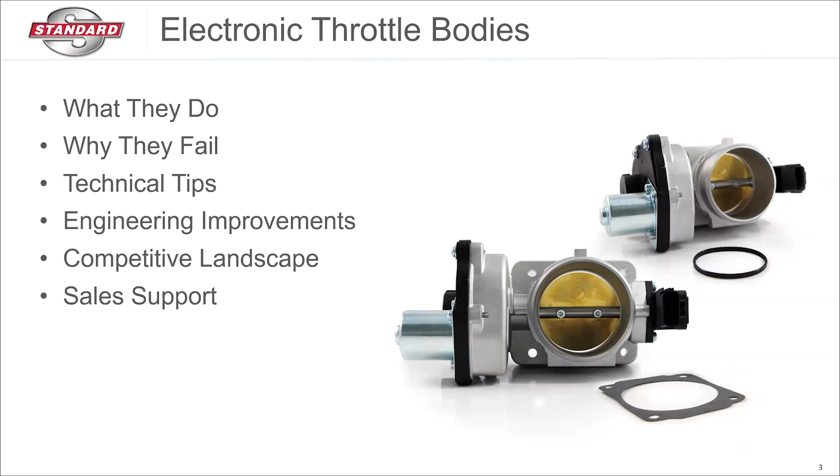So let's talk about what electronic throttle bodies do. It's actually pretty simple. They have taken and replaced the cable. The cable is no longer there. We no longer have a gas pedal with a cable attached to a throttle body, so we don't have those adjustments with wire anymore, like an actual cable. We have drive-by-wire in the sense of pigtails, in the sense of sensors.

What happens is that driver is going to press the accelerator pedal, which is going to send an electronic signal to the vehicle's ECU. If you look on the screen, there's a lot going on all at one time. So you would think, why would we get rid of a cable if we have to add all this in? Well, because it gives us more fuel economy, better acceleration, and in some cases even more power because we don't have a delay. But we do have a lot of things that have to work in unison to make sure the throttle body is actuated properly and we get the proper fuel, air, and spark that we need.

So again, you see on the screen here, we start with the APP, the accelerator pedal position sensor. Once we push our foot down on that, we're sending a signal to the ECU. The ECU now has to say, okay, let's get that throttle blade opened up based on the command of the pedal. However hard you push down on that pedal, we're going to try to command the throttle body to keep up with that command. But there's a lot that has to take place. We see here on the screen, throttle blade, we have fuel delivery in play, spark timing in play, cam timing in play, even mass airflow temperature, knock sensor, and so many other sensors.

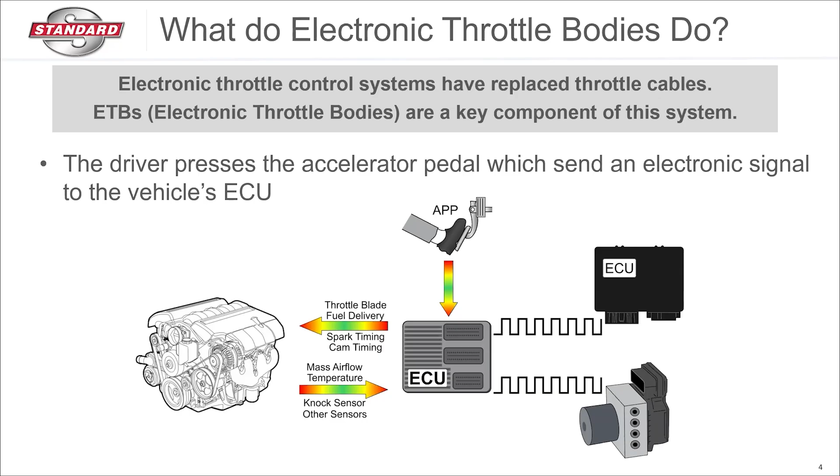And if you look on the bottom right-hand side here, we've got an ABS control module. What would ABS have anything to do with a throttle body? Well, it all works together so that not only the ECU knows what's going on, but the PCM knows what's going on. And we have a smooth transition from the time we hit the pedal to the time we let off the pedal. It's all seamless. So no more cable. It's all drive-by-wire, meaning we have pigtails and sensors doing basically all the work for us through those computers.

So again, what do they do? It's very simple. They're going to use all that data from the position sensor, the mass airflow, the knock sensor, and the ECU, and they're going to send those commands and adjust the throttle blade based on what the command is from the driver, and then what the demand is from the fuel delivery, spark timing, and cam timing. So remember, as we're commanding the pedal, we're kind of demanding things from the motor to do what we want it to do.

And so it all has to work there. The way we get that done after the fact is a two-way electric motor that controls the throttle blade. All of that is taking place at one time just to get a little bit of power to this little bitty motor that's going to actuate that throttle blade. We all know that little round plate inside of the throttle body that flips back and forth - this is the motor that actuates that.

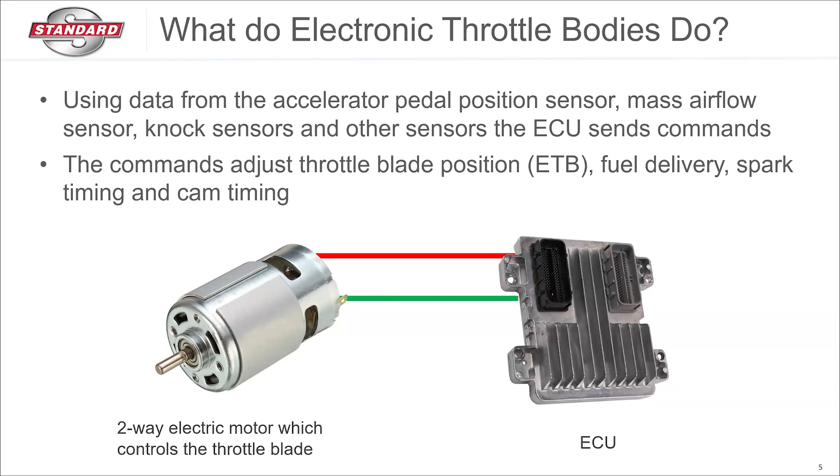So very simple, but not really. Whole lot going on there, right? Let's talk about why they fail, because you would think of all those things going on, there's probably a thousand different reasons why they would fail. And really, there's not - there's actually just a few things right here.

Remember, they're not entirely electronic. We're talking about drive-by-wire, sensors, pigtails. We're taking out the cable, but we still have some mechanical gearing in these throttle bodies that is required to open and close the throttle blade and make it function the way it's supposed to. And they're sealed units - everything inside that throttle body is sealed up, but it's not lubricated. There's absolutely no lubrication in there, no oil, very little to keep those parts lubricated. And they're moving millions and millions of times throughout their life cycle, through harsh conditions, heat, cold - a whole gamut of things come together that cause these to fail internally.

A lot of times it's the teeth of the gears that cause the biggest failure. As you see here, we have an original equipment electronic throttle body with an all-plastic gear train. That's going to come up here in a second - you're going to see why we pointed that out.

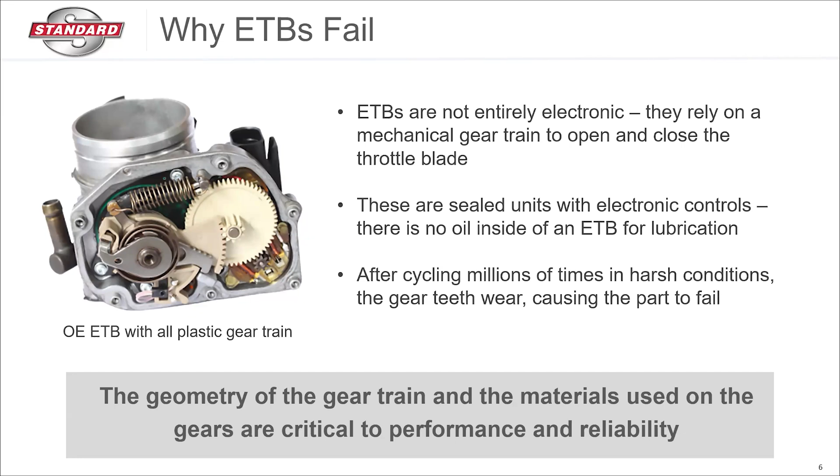Again, the geometry of the gear train and the materials used on the gears are critical to performance and reliability. Remember, these are not lubricated, they're sealed - there's no way to service these. Once you unseal them, it's not like you can just throw something in there and make it all better. If these are starting to wear out, they've already worn out - it's time they need a replacement. So one of the biggest things is that geometry and the quality of the gear.

But there are other reasons electronic throttle bodies fail that are actually a little bit more common. The gears can fail, absolutely, and they do, unfortunately, very often. But one of the biggest things we deal with is carbon buildup on the throttle blade. Now this is just a common thing - we're going to have carbon buildup, but unfortunately a lot of these fail after somebody tries to correct the carbon buildup, or they let it go too long. We'll talk about that here in a second.

But you could also have a failed throttle position sensor. Remember, we don't have throttle position sensors separately if we have an ETB this way - it's all incorporated, so we can't really replace that. There are some cases that's true, but most cases you cannot replace that throttle position sensor. It is part of that gearing or the electronic componentry of the ETB.

We could also have the electric motor go out. Again, we're doing millions of cycles back and forth, opening and closing the throttle blade - stands to reason that motor can go out. But again, it's internal, so we won't be able to replace just that motor - we have to replace the ETB. And then again, one of the more common issues is gear train failure.

So these are a lot of the main reasons, and really that's only five, right? We've got mostly gear train failures, carbon buildup, failed throttle position sensor, electronic motor failure. And then we can also have electronic circuit issues - we might have a pigtail that's bad, we may even have the connectors to the ETB that have gone bad. Again, unfortunately in those cases, we have to replace the ETB.

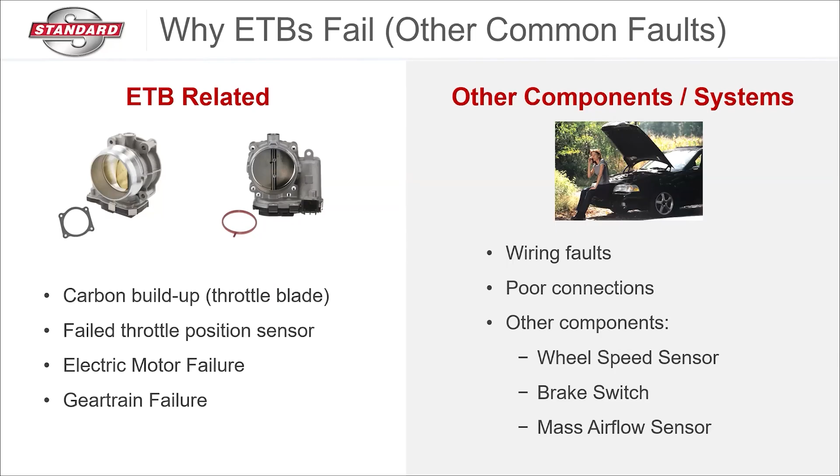Other component systems that could have an effect on an ETB would be wiring faults, some poor connections. We can even have intermittent issues where we don't have the right communication with the ECU or the PCM because of a wheel speed sensor, a brake switch, or even a mass airflow sensor. So there's a lot of things that can lead us to thinking an ETB has failed, but there's really only a couple handfuls of things that do cause them to fail, and we're going to address those in our program here. So here's a couple quick tips before we get into what we've done to correct some of these.

Remember, the ECM is going to compensate for carbon buildup, and that's one of the biggest reasons we have failures with ETBs. Let's say the vehicle has 100,000 miles on it. There's absolutely no way there's not carbon buildup on that throttle body. So throughout those 100,000 miles, the ECM has compensated. It's noticed the throttle blade isn't coming back as far as it used to, or going forward the way it used to, so it adjusts. That way we don't have a rich or lean situation. It makes sure when demand is there, we're putting the right fuel, spark, and everything else together without adding too much air because of carbon buildup.

So if we have carbon buildup and we've cleaned it, we have to make sure we do a relearn procedure. Anytime we take one of these throttle bodies off and have any adjustment done to it, sometimes even just taking it off and doing nothing will require a relearn procedure. If you're working on your own, or talking to a technician having an issue, maybe they cleaned one and it's idling at 1400 RPMs, it probably needs a relearn. Make sure we do that every time.

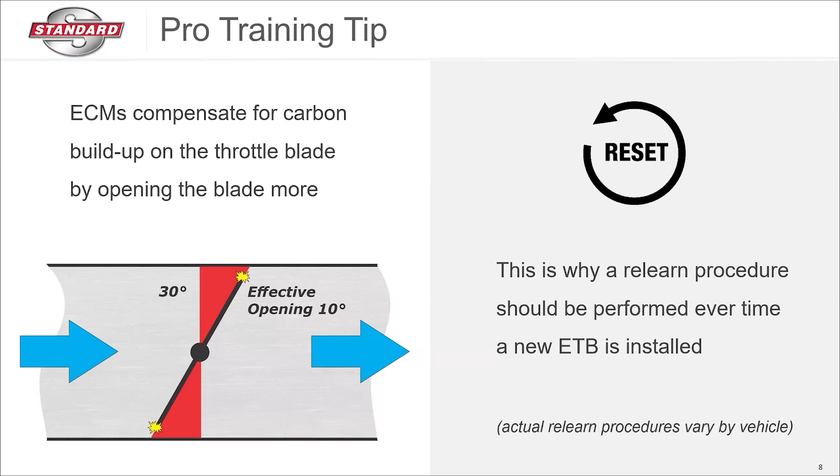We're not programming the ETB. There's no reason to program the ETB. It's relearning it. All we're doing in a relearn is letting the PCM know, hey, this is a new throttle body, meaning the blade is completely closed the way it's supposed to. So now we're telling the PCM to readjust back to the way it was when it was new, and that way we get the right fuel, air, all that good stuff. Remember, when we're doing anything with an ETB, we got to make sure we do a relearn.

Now, if we have intermittent faults, another tip here: monitor that circuit. If we can't reproduce it every time, let's throw a scan tool on there, watch the graph, and see if it cuts in and out or something like that. Usually if that's the case, it's going to be pigtail related or connector related. The pigtail may be fine, even the connector may be fine, it just may be loose. Using something like a Stabilant 22A will actually bond that connection much better, and you won't have those intermittent faults anymore.

So now we know we need to clean them. We need to make sure that they are relearned. We need to make sure that we have a good connection.

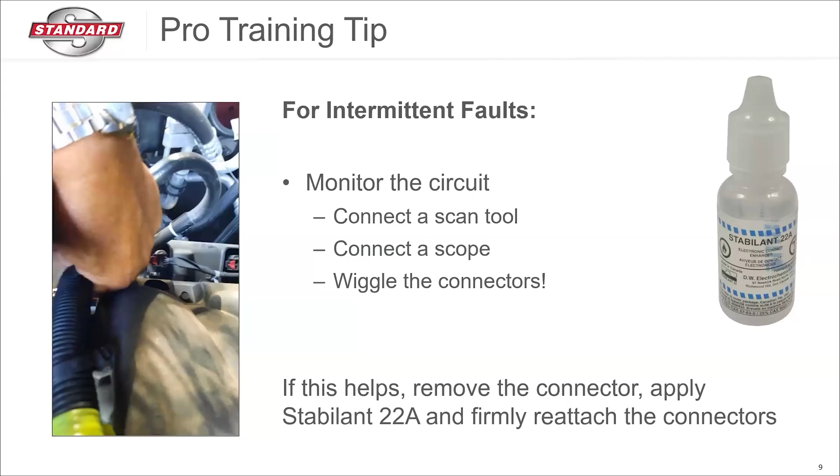Now let's talk about what the options are. We have to remember, and I used to say this years ago all the time, when a customer comes through the door of a parts store, they don't want to be there. They didn't wake up this morning and say, oh, I really hope my fuel pump goes out. That's just not the way it works. So when they come in, it means something has failed, and that's exactly the truth with ETBs. They don't replace it unless it fails. There's no reason to. So when it does fail, we have three options.

We have three ways we can recommend it to them. We can offer them a value line part. In most cases with electronic throttle bodies in the value line, they are remanufactured. They use older electronics, and they're not going to include the required gaskets. They're also not going to have any updates because they are remanufactured.

Or we could try to offer them an OE service part, maybe direct from the dealer or an OE service name. But we have to remember the same design as the part that just failed is what's in that box, and in some cases they fail prematurely. Once again, it may not include the correct gasket because a lot of times those are sold separately when it comes to OE.

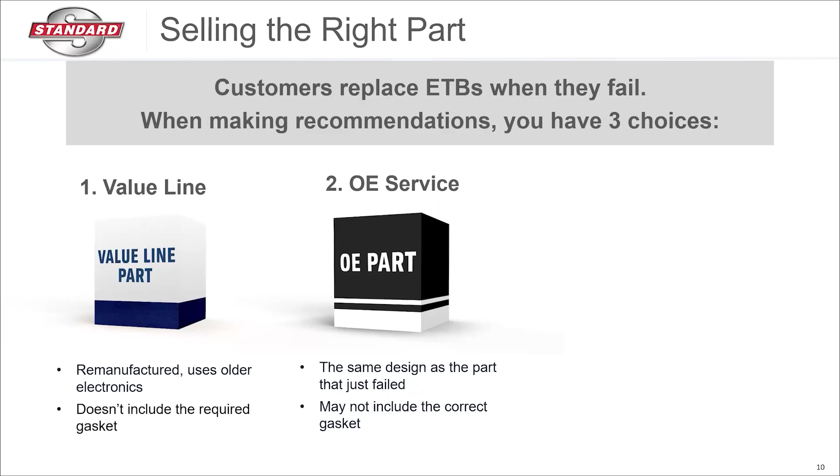Or you could offer the Standard, which is what we think you should do, because what you're going to get in our box is 100% brand new, not remanufactured. It's going to have design improvements that we'll talk about for durability, especially on applications with high OE failure rates. The popular applications are going to include gaskets, because there are some jobs you can't do without replacing the gasket. So again, these are your options.

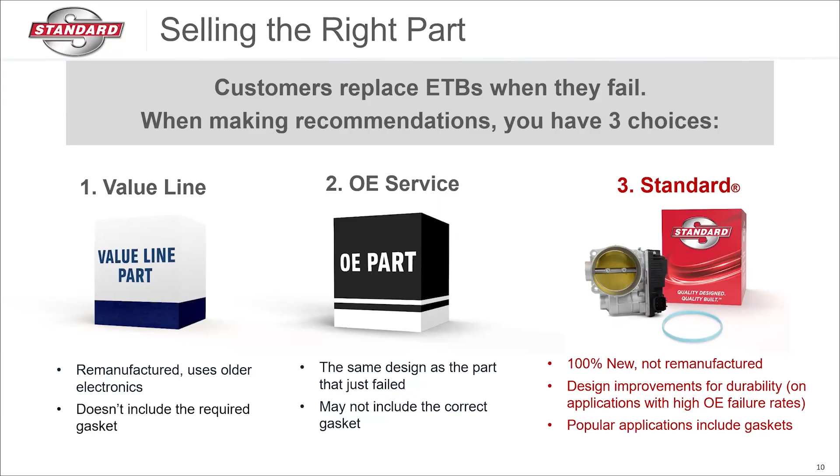Now let's talk about what we can do to show the customer why Standard is the way to go. We already know they're 100% new, there's no remanufacturing, they'll have that seal. Well, let's look at some of the common issues that we've corrected in our box with our ETBs so your customers can have confidence. So here's one example.

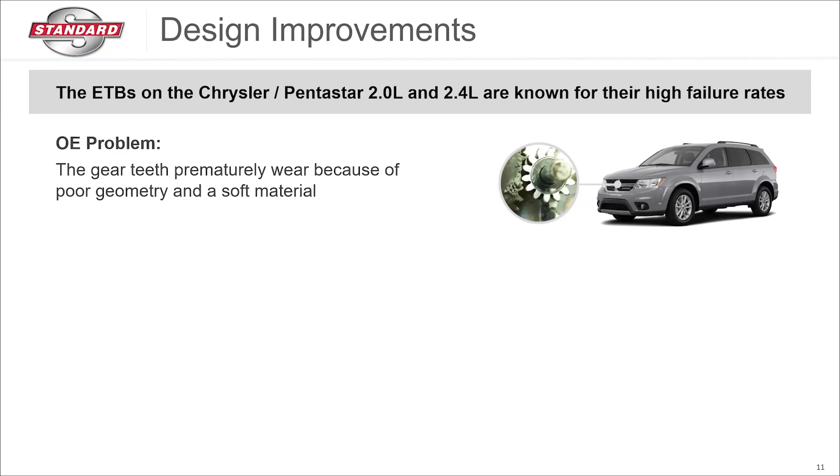Chrysler Pentastar 2.0 and 2.4 liters. Seems like we talk about these cars quite a bit, right? They are known for high failure rates. The problem is the gear teeth prematurely wear, because they have very poor geometry. It just wasn't designed properly, and that gear is a super soft material. You can see in the little bubble on the left side, it just looks like a bit of dirt built up. That used to be a gear, a plastic gear inside of that ETB. Well, that's not going to do a very good job of opening or closing that throttle blade, is it?

So what we did at Standard is we redesigned the internal components. We increased the face width on the gear to reduce stress on it, then we improved the geometry of the teeth for added strength, so they're a little thicker and a little shorter. The geometry is better, they're not going to grind the way they used to. We have a better width on the face of the gear, and we upgraded the material to a stronger, higher temp synthetic material. So in this example, we use a synthetic material and change the geometry and everything else to make sure these don't wear out the way you see in that bubble picture. We're not grinding plastic teeth off anymore - that's one of the biggest problems, so we've corrected that with ours.

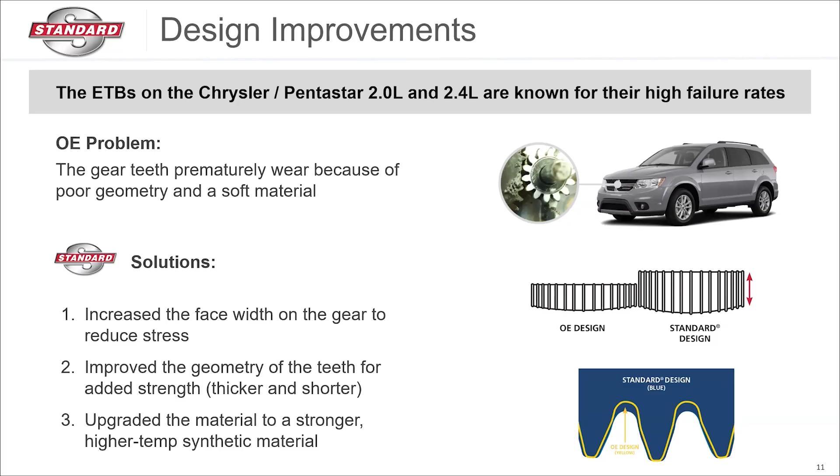So when you do sell an ETB for a 2 liter or 2.4, we've basically fixed all of the high failure rate problems with that ETB. And it's probably going to be the last one that the customer has to put on the vehicle.

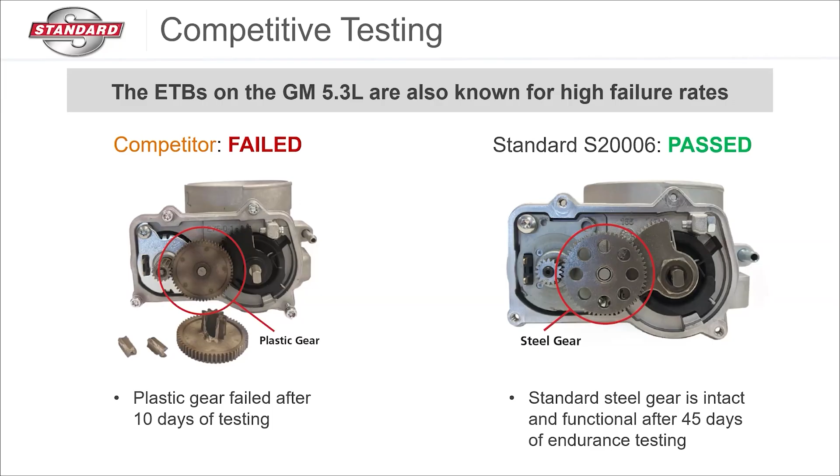So again, what have we done in some of these improvements? Well, we fixed things on the Chrysler Pentastars - we've made sure those teeth aren't grinding and tearing apart. And then on the 5.3 liters, we're doing the same thing. The only difference here is because of that type of system and build, it needed a stainless steel gear, so that's what it has now, and you no longer have to worry about those gears falling apart on the 5.3 liters. So as a whole, when we look at the standard electronic throttle bodies, we're putting out a premium product.

We're correcting OE flaws. We're giving 100% new components, unlike the value lines, and we're making sure that you get everything you need with it, including a seal for a complete repair. Again, accuracy, design improvements, durability, and all made in North America, widely tested.

So I'm here in Irving, Texas. We're doing the call from here right now, but about 30 feet away from me is a vehicle test facility where we actually have technicians that validate our parts on real cars for thousands of miles at a time. These ETBs are no different than any other part in our lineup. We do that testing with those as well.

So again, the best parts make the best parts. We've got stainless steel gears, enclosed contact brushes, sealed constructions, and, because this is a big one, corrosion resistant housings, and stainless steel throttle plate shafts. So we don't have to worry about the shaft itself wearing out, even if we have a good throttle plate, and an electric motor that we have tested from negative 40 degrees to over 240 degrees for performance in extreme conditions.

So I like to say it, and our marketing team came up with a great way of saying it about a year ago. That's what's in our box. And our question to the competition is, what's in yours? And with that, I'm going to pass this over to Patty and our product team to talk about that. What does that competitive landscape look like? So Patty, the show is yours. I think they're ready for you. They may not want to hear me talking anymore.

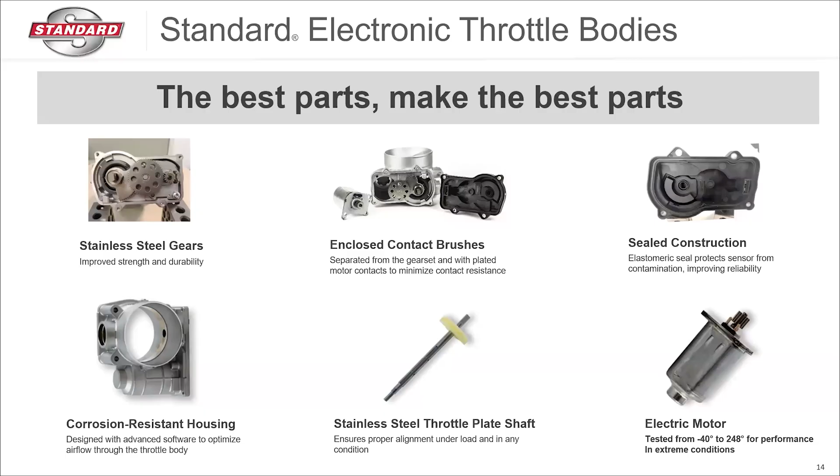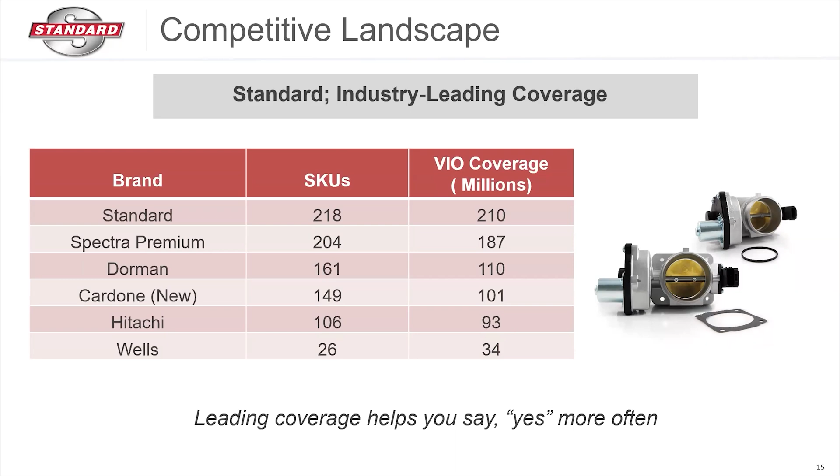Let's take a quick look at the competitive landscape as shown on this slide. I know you probably hear a lot of claims about coverage, but this is the real picture. Standard leads the pack with 218 SKUs and coverage of over 210 million vehicles in operation. That's more than anyone else on this board. What does that mean for you? It means fewer special orders, fewer missed sales, and more chances to say yes to your customers immediately. We're built for this, giving you the coverage and confidence to deliver quality without hesitation. Because at the end of the day, it's not about having more SKUs, it's about having the right SKUs, backed by quality you can trust, to strengthen and grow the relationships you have with your customers, making you their number one and preferred call every time.

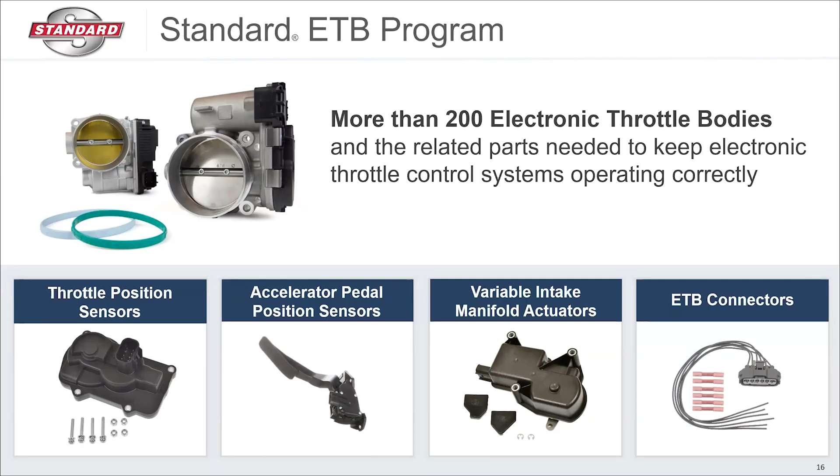Building and maintaining strong relationships and keeping you as your customer's go-to call when something goes wrong is very important to us. We want to make sure you've got everything you need when it comes to electronic throttle bodies, and that means more than just the ETB itself. As shown in the slide above, we back it up with throttle position sensors, pedal position sensors, variable intake manifold actuators, clean plug-and-play connectors. No scrambling, no callbacks, no outsourcing parts and waiting for them, just a full solution ready to go. And because it's built and backed by the same engineering team that understands this technology inside and out, you can recommend it with confidence.

Now, when it comes to throttle position sensors, we're not cutting corners. In fact, many of these are built right alongside our electronic throttle bodies in the same high quality facilities. Inside, we've got an integrated circuit that does the heavy lifting. It precisely measures throttle shaft movement and gives you that accurate linear signal you can rely on. But what really sets us apart is the magnet. It's molded into a high performance polymer and it locks it in the right spot and minimizes friction on the bearing surfaces. Then it is sealed up with a custom elastomer seal that keeps moisture out. We've seen firsthand that's a common failure point in some competitor sensors. The result? A sensor that's reliable, consistent, and built to outlast the environment it lives in.

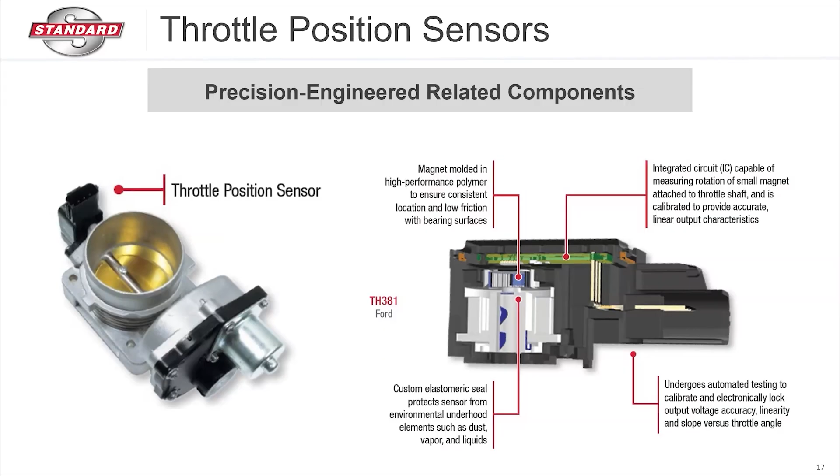Let's talk about accelerator pedal position sensors, or APS for short. They are mission critical for modern throttle control, and we make sure every single one of ours is 100% tested to deliver the most accurate signal versus pedal position. Standard has over 350 SKUs in the lineup, covering 3 decades worth of Standard vehicles, which means when that repair opportunity comes in, Standard more than likely has the solution. What about performance? Our designs are engineered to contact with just a few grams of force, so acceleration and deceleration feel smooth and responsive. Plus, we build in high-strength dual return springs that give the pedal that confident, consistent feel drivers expect every time they hit the gas.

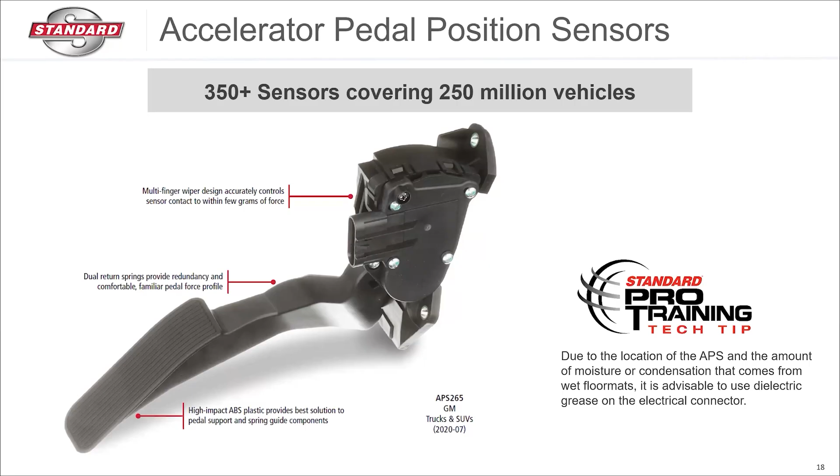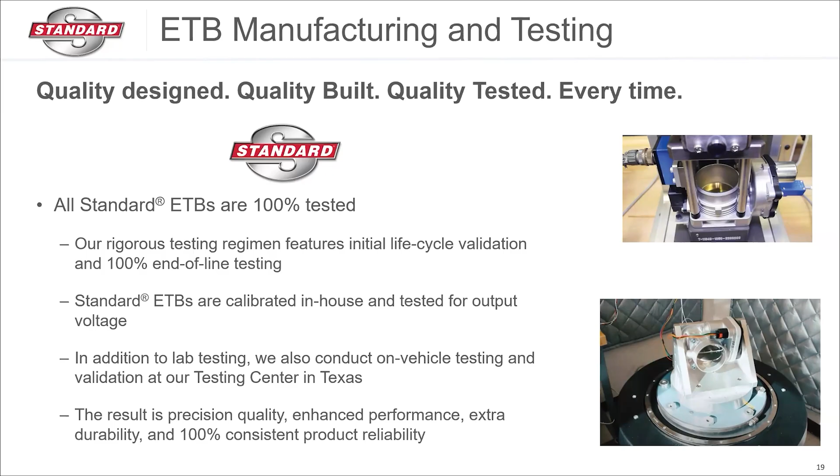With Standard, your customer gets a part that's been through rigorous lab testing and real world driving. So when your customer pulls it out of the box, they can install with confidence, knowing it's built to outperform the competition. And with that, I would like to thank you all for your time, and I'll be handing things over to Marketing Services, who will walk you through the tools available to support these high-quality products.

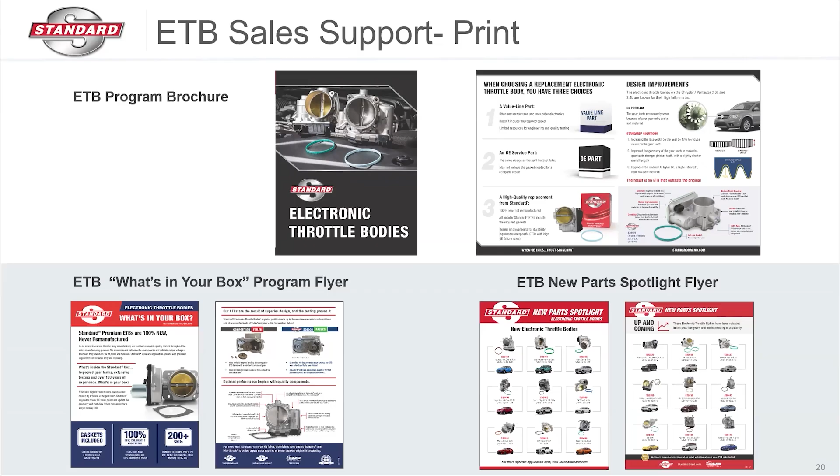Finally, you see there on the bottom right, our latest new parts spotlight flyer. This features new applications as well as up-and-coming numbers that we recommend be added to customers' shelves, as we're really starting to see serious movement on these applications.

Next slide. So now that we've gone over our printed support materials, we also offer digital sales support. So we created an ETB What's in Your Box training video that's available on our YouTube channel that really goes over how ETBs fail and what to look for in a replacement part. It's a great, quick 4-minute resource.

That video is part of a larger YouTube channel, the Standard brand channel, that has a full designated ETB playlist as part of a library of over 700 videos. So there's a lot of great content to watch there. We also took time to create a digital product guide, which provides additional technical information about our throttle bodies and really deep dives into the features and benefits, new and top selling numbers, tech tips, and more.

This guide can be found at standardbrand.com. You just go to the top right, you'll see digital resources, type in digital portfolio, and all of our digital product guides will come up and be able to be downloaded from that page.

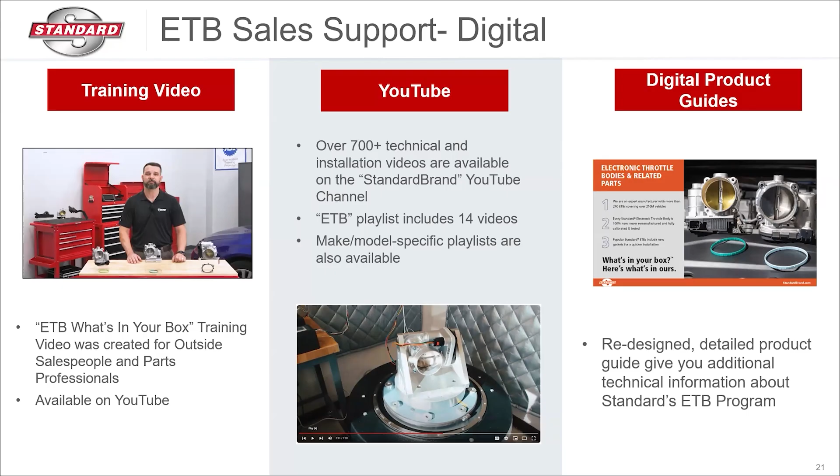We've also placed print ads in popular aftermarket trade magazines to further explain what's in the standard box. In the case of our ETBs, that's design improvements for durability and optimized performance.

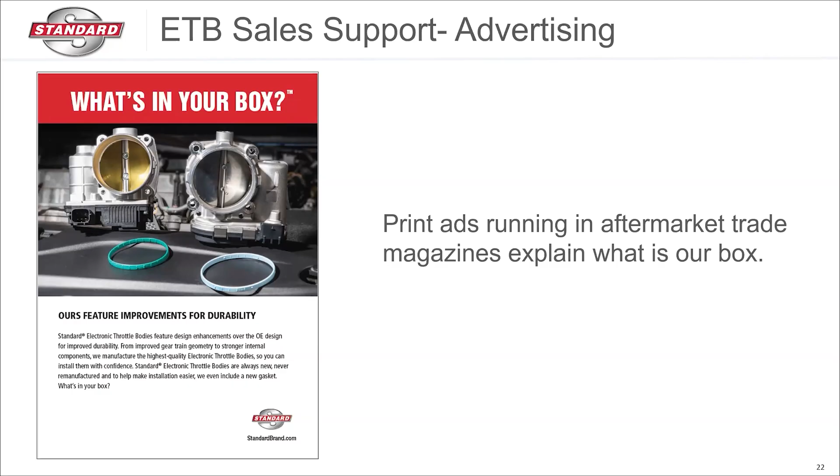Next slide. In closing, all of these materials are really just created around driving home what's in the standard box. When you choose a standard ETB, you're choosing industry-leading coverage and ETBs that have been designed and built in North America with design improvements on applications with high failure rates.

Many of our popular ETBs include the required gasket for a complete repair, and our ETBs can be installed with confidence because they've been tested and validated in the lab and on actual vehicles. Thank you all for your time this morning, and I'll pass it back to Corey.